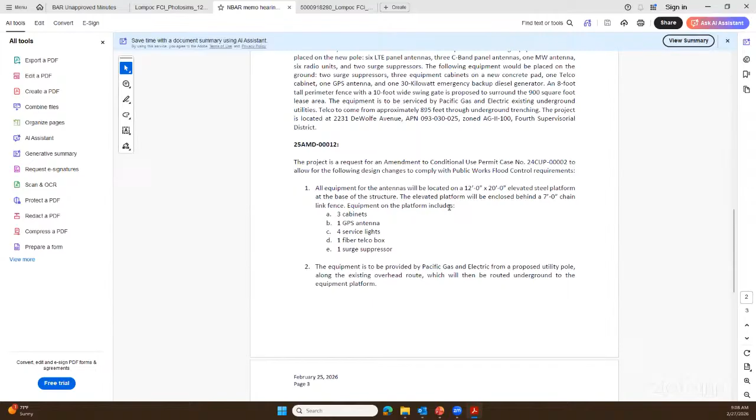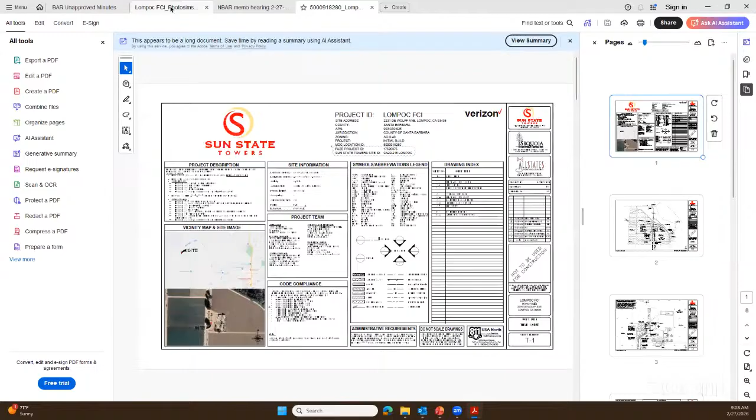All right, I just want to double check on that. Armando, you available? Good morning. Yes, I'm here. Okay. We've gone through this project in the last review items we had, and we looked at just the elevated platforms and what's going to be underneath—is there any screening? I think we've come to a point now where we can just approve this and you guys can be off.

Is there anyone in the audience that has comment on this particular project? We do not have any public comment on this. Then, having reviewed this several times and found it to be complete, do you guys on the board have any other final comments, or do we make a motion to approve this?

Wasn't there a question last time about having some construction details, which is why we couldn't approve it for final, and that's why it was going to come back on consent? We did look at this last month. I don't think that was the case. I think what they had done is elevated a certain portion of it because of the flood control concerns.

Yes, and I don't know if that was completely illustrated in the documents. I think one of the things we asked for was screening on the lower portion of it, but because of the critters and stuff that needed to pass through there, they kept it open.

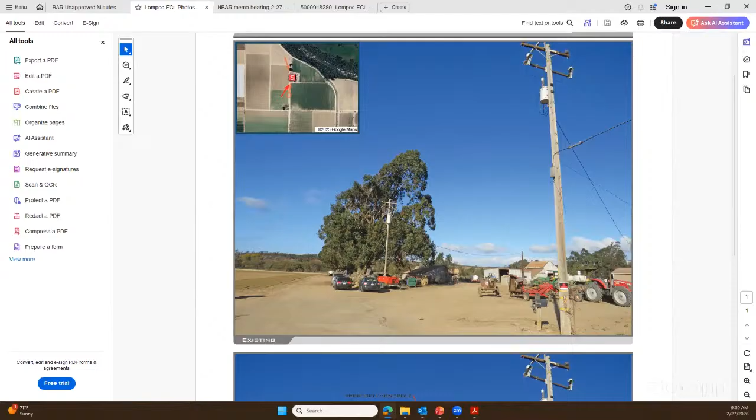So I'm assuming that's been done. Armando, is there anything you want to add? No, I think we're good at this time. Thank you. So with that said, I'd like to ask for a motion to approve this particular project. So moved. Second. All in favor, say aye. Aye. Okay, Armando, thank you, guys. Appreciate it.

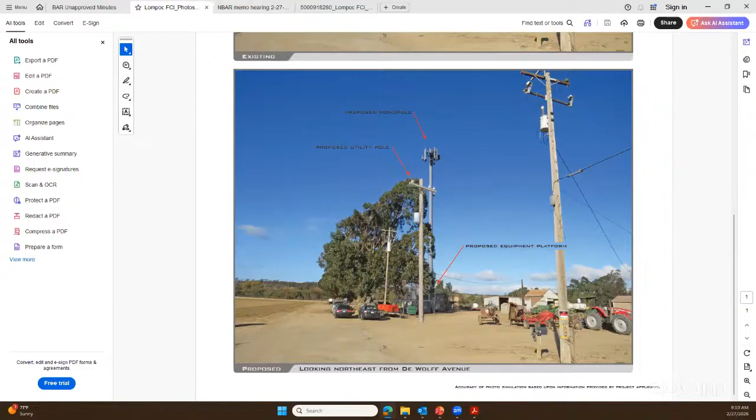All righty, guys, moving on to item number 2, BR 23-00183, Brisa Encina Child Care. Frank, if you want to introduce yourself for the record and begin your presentation.

Frank Thompson. I'm the- give me a second. Can you press the button to unmute it? There you go. Okay, thank you. Frank Thompson, yes, I'm the applicant for the project.

I think we've been here a few times and benefited from your comments. Give a little more volume. I'm sorry to interrupt. Yeah, no problem. That's better. All right, and I'll be assisted today with Pablo Romero, and I think also Guillermo is here.

He's the landscape architect. So if you want, then Pablo, do you want to give an introduction?

Yes, good morning, can you hear me? Yes. Oh, okay, excellent. My name is Pablo Romero. I'm representing RJC Inc., the architect for the project. On the last session, we were asked to address the murals.

We recommended some murals be installed in the two main facades of the building. We had originally picked up some generic imagery, stock images, and we were asked about that, and whether that was going to be the permanent imagery or not.

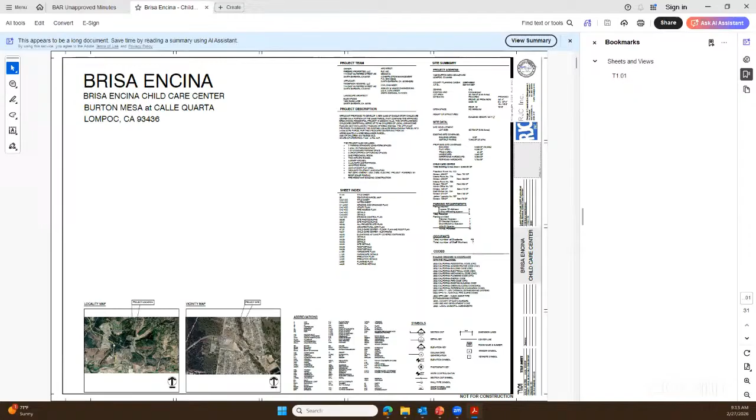Also, Guillermo Gonzalez, our landscape architect, will also be presenting his part of the design. So with that, I would like to jump, unless you want us to do a more thorough presentation of this. I would like to jump to sheet 16, which is the elevations.

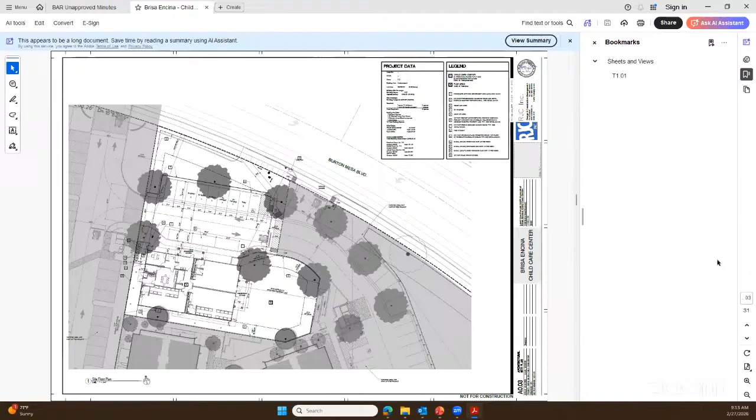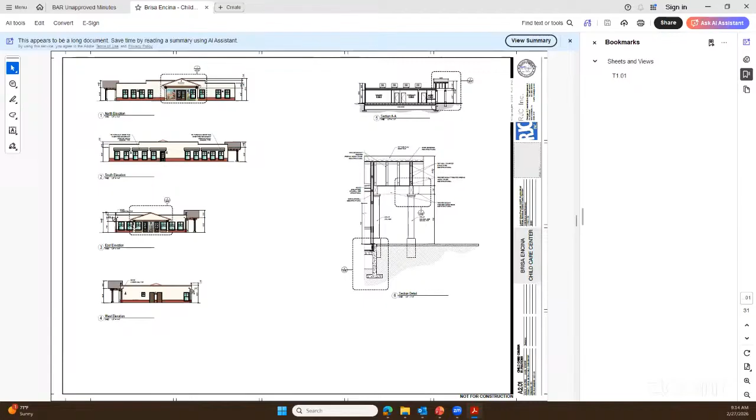Thank you so much. So as you see, we haven't modified anything relative to our elevations other than bringing up the imagery that Jose has generated. Let's go to the next sheet, where we have a larger view of those entry points. So these are now, at this point, originals that have been incorporated.

The theme is very jovial, and talks about bookworm and some other themes relative to the heart of the trees, going into this theme of reading and what have you. So this has been the interpretation that our local artist has generated, and how we've incorporated it into the design.

So again, basically it's the same concept architecturally speaking. We didn't modify anything in our architectural language. We basically just incorporated the murals from Mr. Bustos. That is what we have today to discuss from our end. Of course, we will be open to discuss any other items that the board might have.

And with this, Guillermo, I guess the floor is yours. Thank you, Pablo. Good morning. My name is Guillermo Gonzalez. I'm with Blue Studio, the landscape architect for the project.

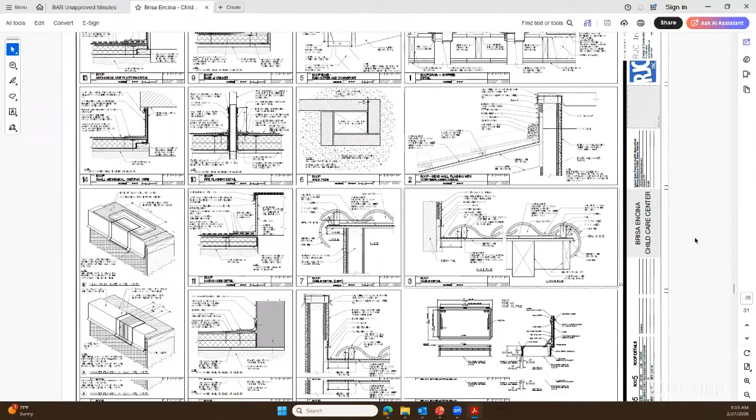As Pablo mentioned, we received preliminary approval back in November, and were asked to come back with a planting plan, irrigation, and details. So if we can move to the planting plan, that would be the hardscape. We're only providing hardscape for the play area and play details. So we have the irrigation plan completed, and then irrigation details.

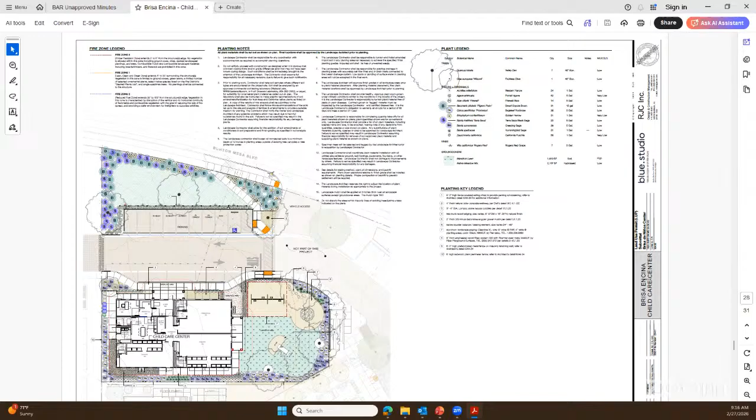And then we have the planting plan completed based on the preliminary approval, and the next sheet will be the planting details. So I'd be glad to answer any questions you guys have, but with this, I would conclude my presentation.

I went through your landscape plans, and they're pretty complete, and they're fine. I just had a couple comments for you. The runtime that you put in your notes of 5 to 9 p.m., I would reverse that from 9 p.m. to 5 a.m., given the wind, especially for the area where you have a spray system. It's probably just a typo.

And in your backflow detail, I would encourage you to include a cage and a thermal blanket on it. I don't know about where you are in Santa Barbara, but up here we have a lot of theft of backflows. Oh wow, okay, thank you. I appreciate that. Put the cage on there, save yourself the long-term money, and a thermal blanket, because you could have a potential for freeze up there. Okay, I appreciate that. Thank you. And that's it. Thank you.

Mr. Chairman, just real quick for Kevin, do those usually come colored, like colored green, the cage and the blanket? Yeah, they come, you can get them painted green or stainless steel, either one. But a lot of people use the green ones if they're in landscape to help it disappear. But either one of them will be fine. That's your choice, it's just a suggestion. I'm not making it a requirement for you.

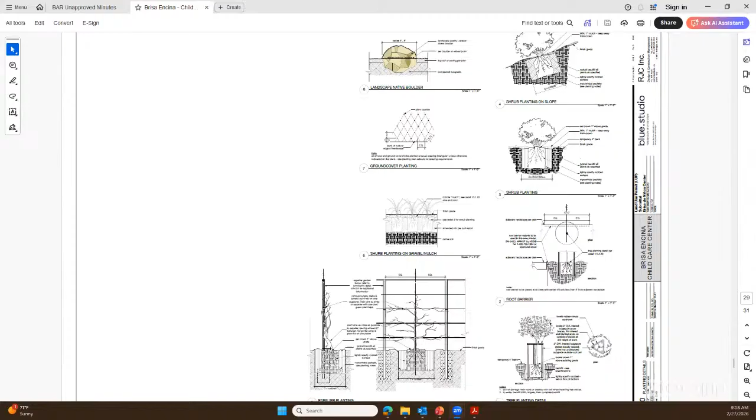Okay, I have a question about the murals. Could we see those larger, please? I guess the next sheet is the one.

Look, hmm, like what we saw before. The colors were brighter. Yeah, yeah, I believe that was all just stock imagery. I'm sorry, it was all stock imagery? No, the one that we saw that had these trees on it, it seemed to me 10 minutes ago it looked brighter. Yes, yeah, I concur. There you go, there you go.

Just a comment, my first impression when I looked at this was, are kids going to see that as scary? Those trees look a little kind of haunted to me. It may just be my taste. I don't know, but I think it might be an interesting thing prior to making a final decision on this to maybe have a couple of kids just look at it. They're going to be walking in and out of there every day, and unless they're going to have an explanation as to what these mean, and they may have significance, they may be very well thought out. I don't know what the story is about them, but right now I look at them and they're kind of gangly, they look like a tree octopus, if it makes sense. And one side, I don't see how it relates to the other. Those are just my personal comments.

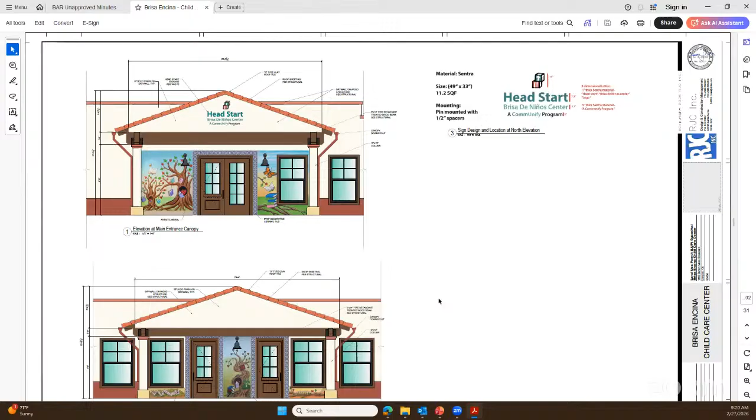On the elevation there, I don't know what material you're using. It says drywall. Is that what you're supposed to, is that what you're using, where it says Head Start? Hello? I'm sorry. Yeah, it's actually stucco finish, it's supposed to be stucco and not drywall. It's listed as drywall on all your details and that stuff, so you need to clean that up.

Also, I'm not going to require that you do this, but you need to really look at the top of the column and how it intersects those beams, because you're going to end up with water and you're going to end up with rot. So you need to address that in some thought-out details.

You've got a parapet wall that's sticking up 1.5 feet right there. I don't know how thick it is, but I think it's going to read as a thin wall. You need to beef up the corner of the parapet so that it reads as like 12 to 24 inches thick, so it's more like a stucco-y kind of a heavy feel.

And that's about it. Excuse me, do you mean the parapet wall behind the gabled structure? Yes, on that drawing it's over on the right side, it shows it's about 1.5 feet higher, the area in the middle where you're gonna see the edge of it. You don't want to just have a little wall sticking up. Oh, I understand, I understand what you're saying. Make it look at least as thick as your columns, which are gonna be like 12 inches or something.

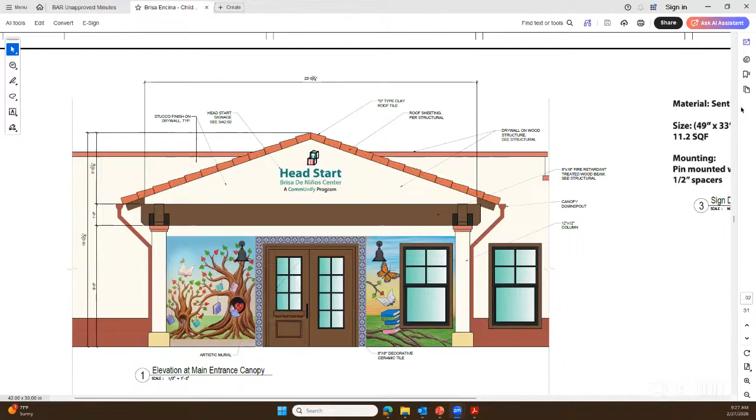You're supposed to see some architectural details around the windows too. We do have architectural details, we presented those the last time. I think you can see those starting in sheet 18 - we have wall types and what have you, starting at page 18, 19 is wall details, parapet details.

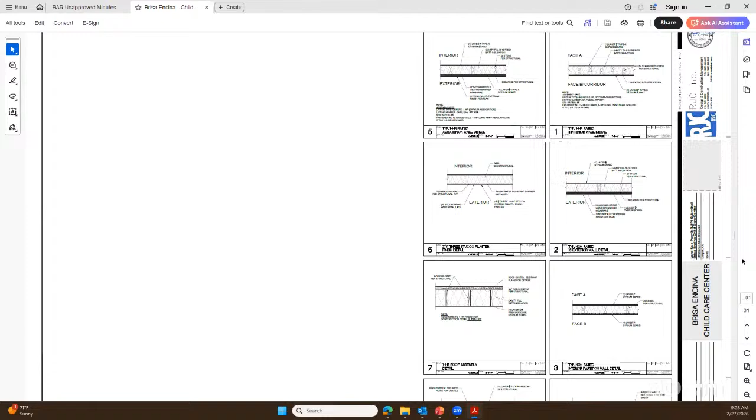Okay, well I was thinking more along the lines of the trim around the windows, around the doors, how you've shown tile around the door, the details for that. I believe that was lacking from your previous submittal. I know you had the wall sections, which are the actual plan construction for the walls, but I was thinking more along the details of the windows and doors, how the tile - but maybe you've included those now too, maybe I missed it.

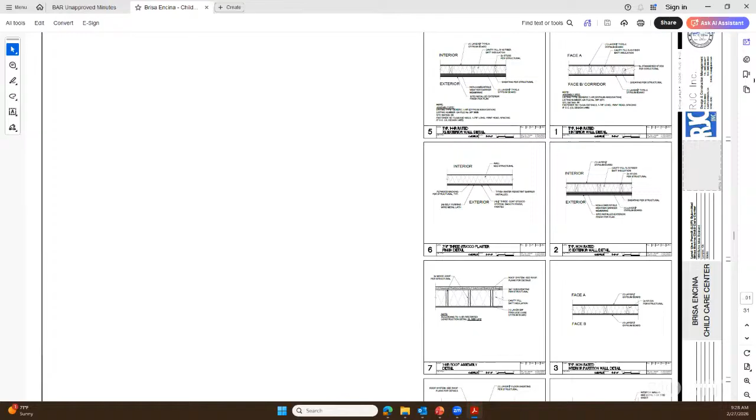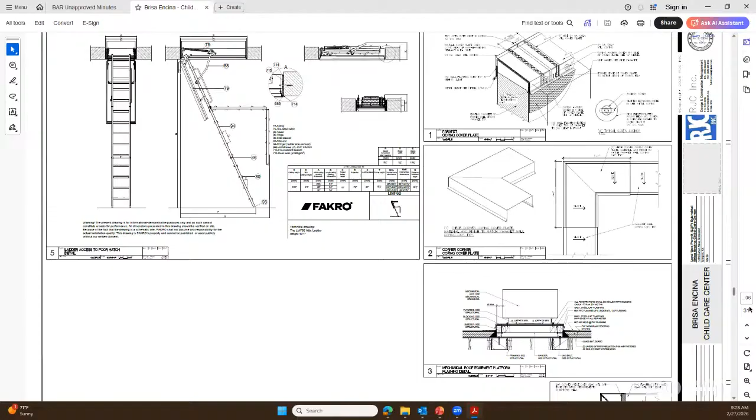Can you direct us to those details if you have them? I don't think we have the specific tile detail, but we do have the baseboard detail, for example. We have connection of canopy beams to columns details, that's on page A403, the column details that were requested.

The comments we received a couple of meetings ago, we poured all those in. Are we missing some details? Yes, we are, we're still not in building. I'll withdraw my question. Don't worry about it.

How far along are you on the construction side and the building permits submittal process? We have not started that one. There's a funding situation here where planning is kind of required to get funded for the remainder of the process, and to that effect, Frank can talk more about that.

Going back to that last drawing, when I was talking about the top of the column to beam detail, detail 9 for instance shows a structural connection, but it doesn't show - you're going to end up with these little water pockets. What I was really asking about before was how the stucco works and how the flashing works, and how you're going to make sure it doesn't end up with a puddle. So it's just something you really need to flesh out, on that gigantic beam.

The flashing detail, you mean? Flashing and how you're going to trim the top of the stucco, whether you're going to put something up there, how it's going to work. Because right now, when you add stucco to it, you're going to end up with a pocket about 1 inch deep where the beam goes across, and you just don't want to do that. If you can just combine details 9 and 2 - yes, because it was left off, the beam.

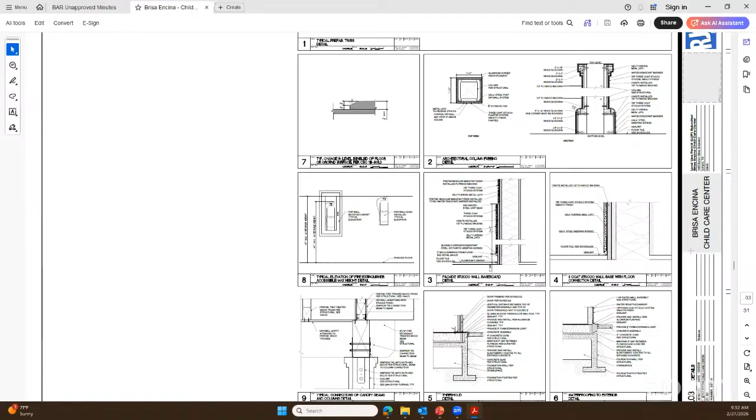With that said, I'll ask for a motion to grant final approval on this project. So moved. Second. All in favor? Aye, aye. Okay, off you go, great. Thank you so much. I want to see it when it's done. I'll see it every day. Thank you.

Okay, moving on now to BAR number 2300186, the Mittry Farms Personal Storage in Orcutt. If the applicant is available, please go ahead and introduce yourself for the record and begin your presentation.

Good morning everyone, it's great to be back. Francis Romero for the applicant, but today we have the man behind the magic, Locke Soderquist, our architect. So it's pretty much going to be his show, and I'll be here to cheer him on and provide support as needed.

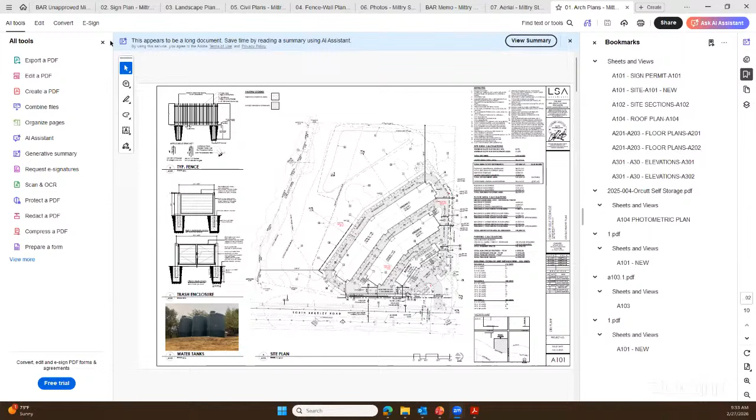All right, thank you. Thanks for having us today, and thanks for making the time. That's an amazing painting, I've been looking at it all morning, it's awesome. My name is Locke Soderquist, I'm with LSA Architects, and we are here to further conceptual review the Mittry self-storage project.

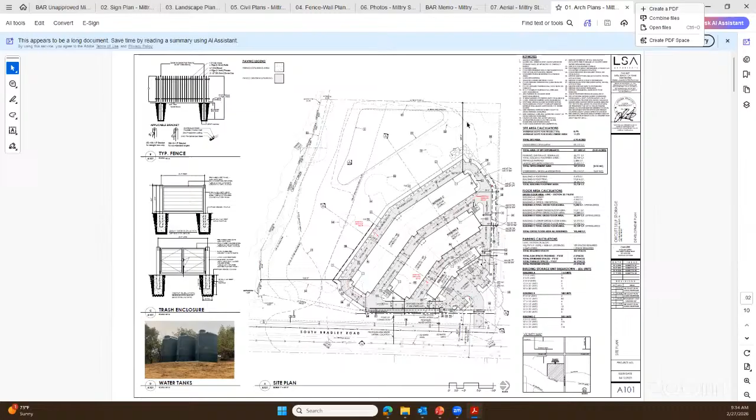It's a new personal self-storage facility on a 6.93 acre parcel at 5175 South Bradley Road in Orcutt. You guys have looked at the project before, but it's been a while, so I'm going to recap all the details. The project consists of 3 two-story buildings. Building A at the top is 9,240 square feet. Building B is 38,099 square feet. Building C is 55,398 square feet, with a total floor area of approximately 102,700 square feet. The project consists of a new monument sign, front setback fencing with walls exceeding 6 feet on the interior side, the project development side. There are no existing structures currently on the site.

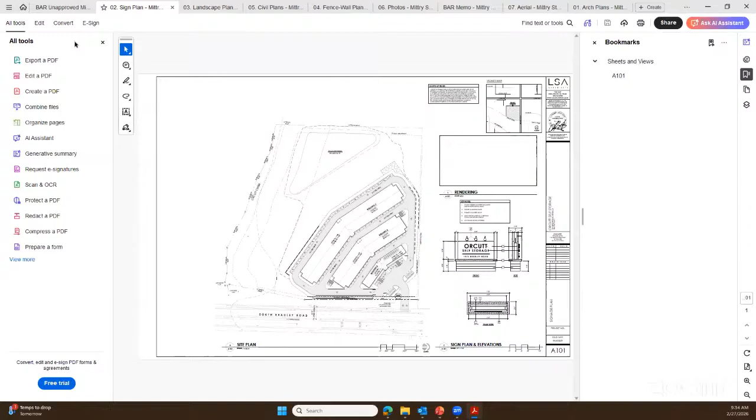At the August 29 meeting, the board was generally supportive of the design and provided several specific comments. Today, I will briefly describe the project and then address each comment directly.

So a brief project overview. The site slopes downward from north to south towards Orcutt Creek. The buildings are stepped down to follow the natural grade. There are driveways between the buildings that access the upper or lower level, depending on the building. The tiered configuration reduces perceived mass and follows the existing topography. The grading plan maintains the previously appreciated stepped approach and contouring along the creek edge, minimizing visual bulk and integrating the project into the slope.

Architecturally, the buildings utilize articulated facades, clerestory windows, and material variation to reduce scale and provide some depth. The roof form is a low-pitch standing seam metal roof, or corrugated metal roof, with stepped gable ends that break up the Bradley Road elevations. There will be no rooftop HVAC equipment, keeping the roof planes clean and uninterrupted.

The previous NBAR comments, we had a few of them. You guys requested street level renderings, so we provided some, with views from Bradley Road and views from the creek, the development that's opposite of the creek.

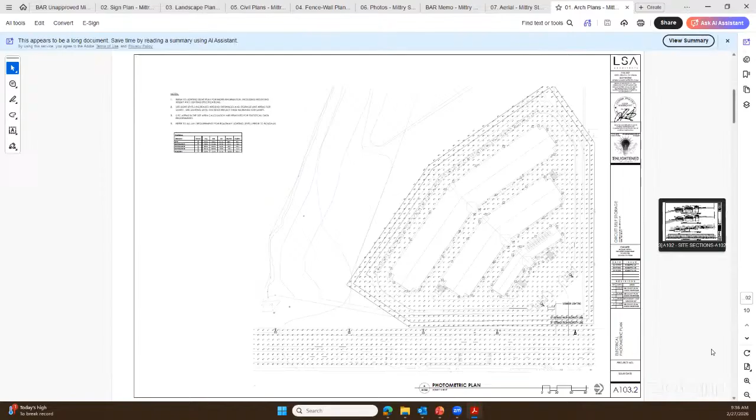Another comment was studying the large roof planes. The board requested further study of the large roof expanses. In response, the roof has been articulated on the gable ends, which was actually something in the previous submittal. The gable ends that face Bradley Road are articulated.

There was another comment related to dark sky compliance, and all the proposed site and building lighting is fully shielded and downward directed. All selected fixtures will be dark sky compliant.

There was another comment regarding the grading and step contouring, which we've maintained. The overall design approach from the beginning was to create these shapes that followed the contours of the site. We were sinking the buildings down into the site as far as we could to shield them from view on Bradley Road, while at the same time keeping maximum driveway slopes to something manageable.

There was another comment related to roof-mounted equipment, and we don't plan to mount any HVAC equipment or anything on the roofs.

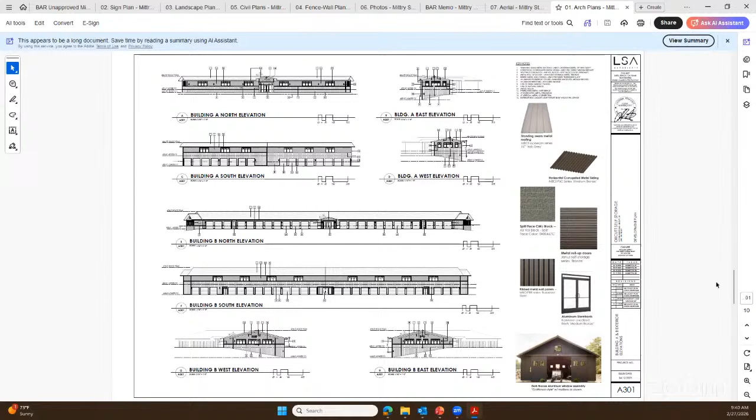The monument sign is a separate submittal, shown here. It's a 6 foot by 3 foot tall sign face with painted aluminum panels, cut acrylic block lettering, and a board form concrete base. The lighting for that sign would be dark sky compliant. The sign is relatively modest in scale, with landscaping around its perimeter.

In summary, the massing has been articulated while still maintaining the functionality of the project. It follows the slope of the hillside. The gable ends visible along Bradley Road are articulated with step-down segments and clerestory windows. There's no rooftop mechanical equipment. The lighting proposed is dark sky compliant, and the grading follows the natural contours of the site. The views across the creek were considered, and we request the board's continued consideration of the project. I can answer any questions you have.

I just have a couple of things to add for context. At our original meeting, the driveway was in a slightly different location. It has been relocated based on requests and requirements from Public Works Transportation. And again, as mentioned, the sign plan is a new submittal along with a CUP for the fencing, because our wall and fencing along Bradley in the right-of-way area exceeds 6 feet in height. But as you can see when we look at... oh, that's different, can we go back to the visual sim?

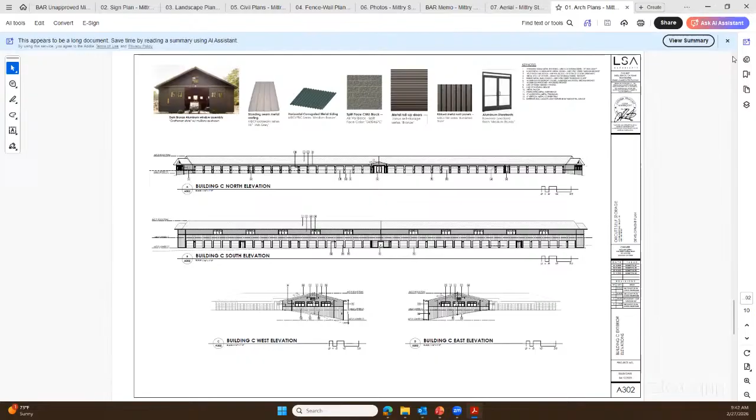Wasn't there some question initially about the water retention basin or infiltration basin down below and its adjacency to the creek? We're addressing that with a text revision. We're already doing a general plan amendment, and based on the fact that county policies allow those types of public infrastructures, we're basically adding the word private infrastructure — really, what's the difference between a publicly built basin and a private one? There is no difference, and the water flows downhill into the creek anyway, so it's more of a pragmatic approach. My question was basically whether you have continued consideration on that issue and are working to resolve it. Yes, and staff is supportive of us submitting the additional text amendment to allow private and flood control as well. Okay, great, thank you.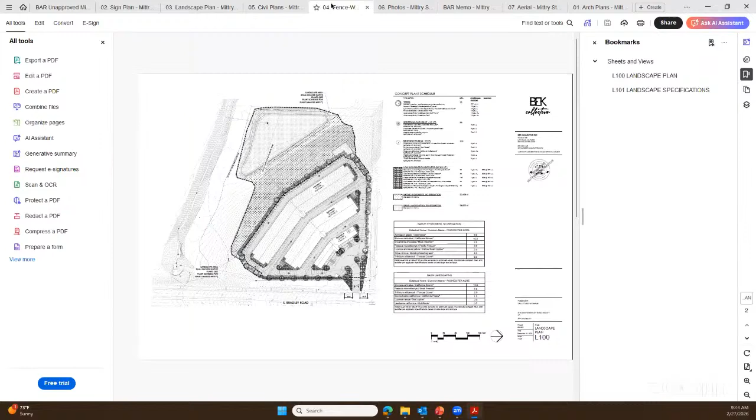I'm trying to understand the grading concept a little bit. You've got 10-foot plates, and each building drops 10 feet, correct. Is the right side, the north wall, pretty level? Not the driveway, but the property line — is it level? The property line maintains existing grade. Is the existing grade pretty level across, or does it slope? It all slopes, yeah — all the existing grade slopes down towards the creek. Does it slope north to south on our lines, does it go downhill or is it level? Let's look at the grading plan. I think it varies — in some places it slopes down towards the site, in others it slopes up a little. Because of the way your buildings are designed, it drops 20 feet from one end to the other, correct. So it's not really following the contours if it's level, right?

Well, the way we designed it, we're maintaining existing grade from Bradley Road at the public right-of-way property line, with a wall and security fence on top. Then inside we have driveways that make the 10-foot transition between buildings. So when I say follow contours, the contours are kind of a boomerang shape, and we designed our buildings in that same shape. Building C follows the contours, but the driveway on the right side is significantly lower than the property to the right, correct, by about 20 feet. So you've got a 20-foot retaining wall? I don't think we have a 20-foot retaining wall there — if we zoom in on that area you could see the max height. The top and bottom of wall elevations are described there; I think it's 14 feet total.

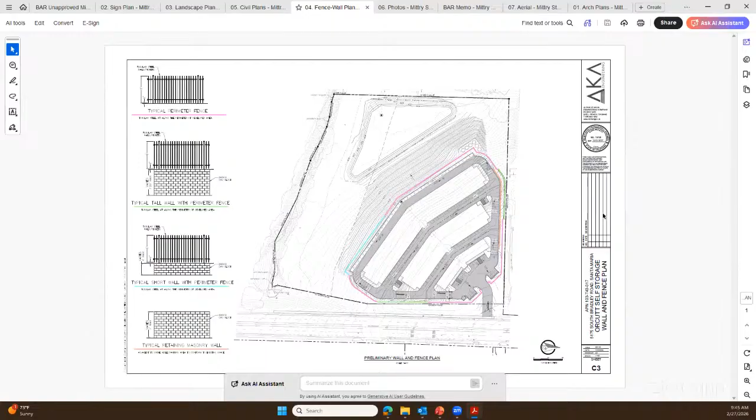And so what we're trying to accomplish there is just sink the buildings into the site as far as we can to limit the visuals from the outside.

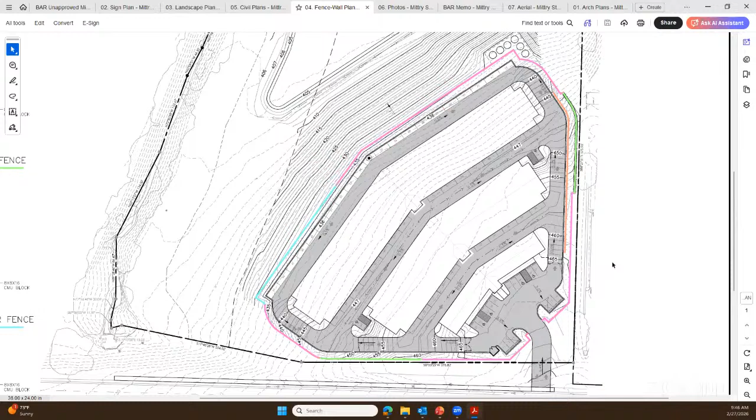Where does the retaining wall start? Is that the green? Is that the retaining wall? Yeah, there's two of them. The green one, and then on the inside there's an orange one. If you go to the left, we can see the legend to see what they are. Oh, I see, each one is individually labeled.

Okay, so the green. Let's go back and look at the grading plan. I don't want to look at the retaining wall, I want to look at the grades.

So how does it go up in that upper right-hand corner? What are the grades, you've done a lot of grading there. We have, we've sunken the buildings into the site. There's a location where there's only 10 feet from the property line to the driveway, maybe it's 12, I don't know the exact dimension, but because of that we have a substantial elevation change at that location, and we've accommodated that with a terraced retaining wall system.

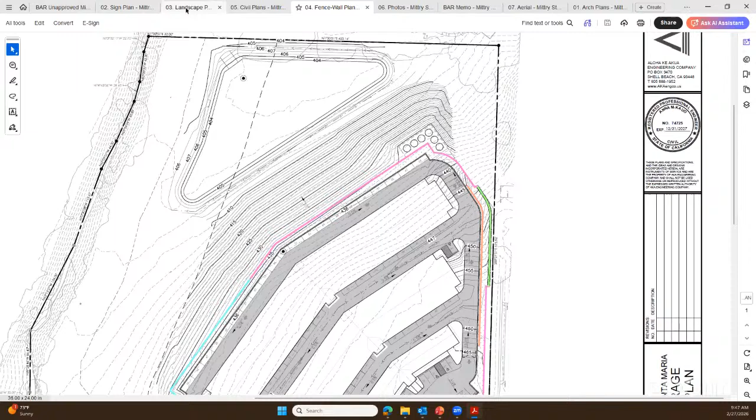But there's actually a better way to look at this. If we look at the grading plan, we can see the actual spot elevations right there. Do you have a grading section through there? There is a grading section through there. Yeah, well right there - there's your stepped walls. I like stepped walls. Yeah, so you can see the typical section A is over on the left-hand side.

Yeah, I'm pretty sure that corresponds with that location. So it's like lower left, if you're able to scroll up on the sheet, lower left side. Yeah, there we go, so that would be the section that describes that location.

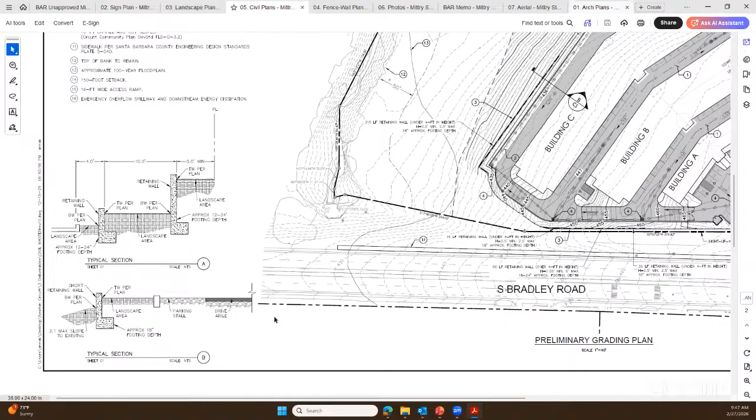No, I mean showing the buildings, the existing lot, the existing grade, the future grade. We do, kind of - we have that one too, that's in the architectural set. So if we scroll up, there's a section sheet that shows overall site sections. Yeah, keep going - right there, up one.

And so if you could zoom in on the top, that's natural grade versus the building location, and it depends on where that's cut, because the farther you go to the top of your sheet... yeah, it changes - the existing slope radically changes.

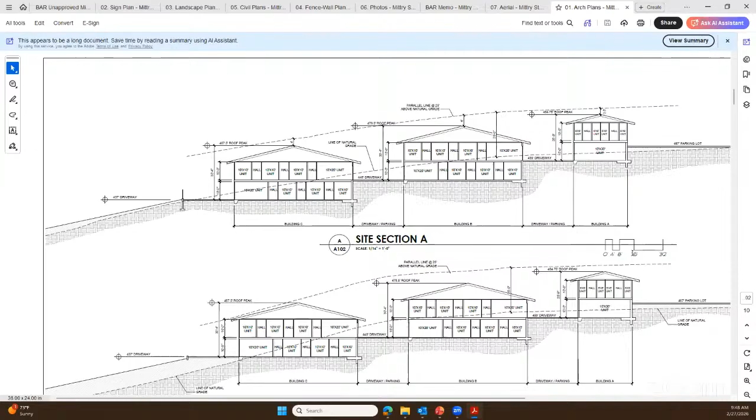Yeah, you're right. So if you can see the two different elevations, the natural slope runs through on the upper one - you can see the lower dotted line that's curved is the existing slope. And then down below it raises a little bit depending on where it's cut on site. But the site plan shows those two cut locations, so you can evaluate both those locations as they relate to those sections.

And then that would be the view along Bradley Road. Where do you have your stepped retaining walls? How much depth, how much width are you putting in there? Is it like the size of the footing or just...

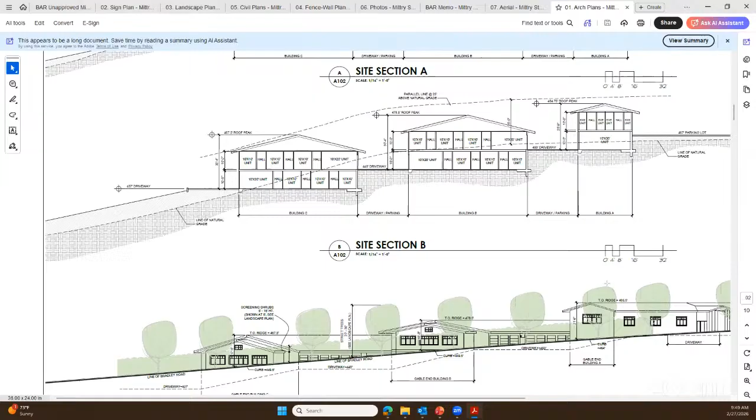No, from one retaining wall to the other, do you have significant distance - is it 10 feet, 20 feet, 50 feet? Yeah, there's - so the building, you're talking about the total building width, like you can see the distance between those retaining walls. I mean, on your grading plan, where you have the 14-foot cut. Yeah, it's 14 foot over how many feet? Oh yeah, okay, so if we go up there and scroll back to that grading plan sheet that showed those sections, there should be a dimension on the site plan or the grading plan that shows that.

I want it to look as natural as possible, but I'm not visualizing exactly how big a scar you're putting in and how it's going to blend in with the existing creek. Yeah, so all of that.

Well, if I could for just a moment, the Orcutt Community Plan dictated the location of the driveway at the northernmost corner of the site. It also dictates that the 3-acre envelope is what we're allowed to develop, based on the approval of the Orcutt Community Plan.

So the Orcutt Community Plan envisioned the 3-acre area where the buildings and driveway are located as being the area of development. The only time we went beyond that 3 acres was to fill the slope so it would have a natural appearance without showing the 14-foot retaining wall system from the southern view.

I know what spot you're talking about specifically. Thanks, Francis. So you're talking about where we cut that section.

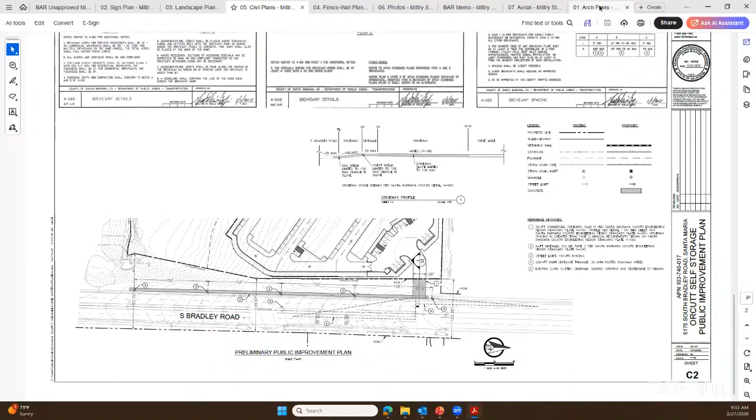I think the site plan, the next sheet or two up, will show an actual dimension there. So we have 19 feet 3 inches from the property line to the driveway, and both of those retaining walls are dealt with in that 19 foot 3 inch setback.

Those are shown on the site plan as the dark, hidden lines. Downhill from building C, beyond the fence line, it's cut on site, and the site was altered so we took some of the cut from this area and put it around the backside of that lowest retaining wall to reduce its size as it relates to the Orcutt Creek view and the view from that direction in general.

So the retaining wall was probably about 10 feet tall, and we're backfilling, taking some of the material and grading it out to reduce the height of that wall. We're trying to do that in an organic way that follows the natural contours as best as possible, and it's planted with native plantings.

I don't remember the retaining wall heights on your double cut section, are they 7 feet apiece or something? You know, those civil sections always do a vertical scale and horizontal scale that don't match, so if we go to the grading plan again there should be spot elevations showing top of wall, bottom of wall. I don't know them off the top of my head, but we can get them.

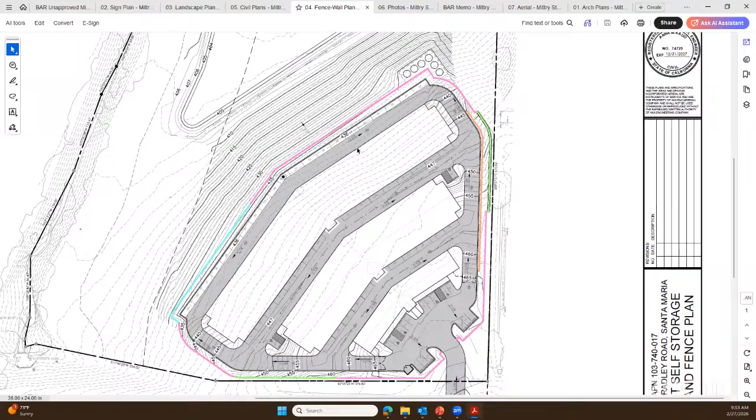I just mean visually, from inside the development that's where you'll have that impact with those two walls. From the outside, we're trying to maintain natural grade so you don't really see any transition. So building C will be lower than the existing grade currently - yes, they all are. But the far end of building C, on the south side where that parallel parking is, will be elevated a little bit above natural grade.

Did you have to deal with hillside ridgeline rules at all? We did, yeah - that's why it's down. You can see in those building sections or architectural site sections we had that max height limitation plotted there, and we're well below that. But let me get up there closer to see what the elevation sheets are.

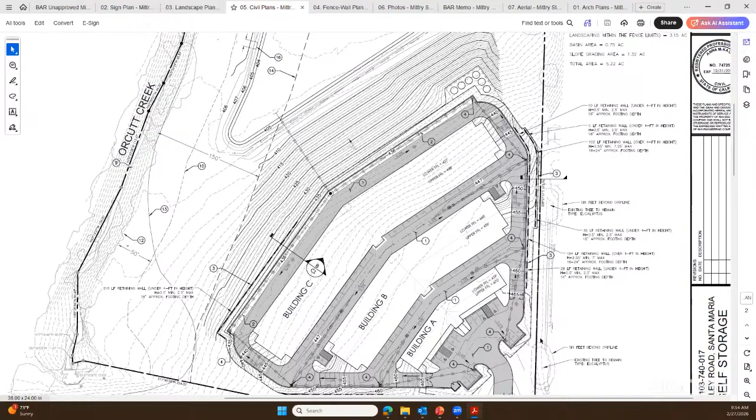Can you take it with you? I could just make it larger. Okay, well I was just looking at it. So it looks like the lower wall is 2.5 feet max height, and then the upper wall has a max height of 7 feet.

So the rest of it's made up with slope? Yeah, there's actually not that much slope there because it's so tight. So it's basically just two walls terraced at that height with a slope area between them that's sloping the other direction, downhill, and that would all be landscaped too.

So it's not as high as I thought. It's actually like 10 feet max height total, both walls combined.

Okay, now I kind of understand what's going on. I like what you did with the end of the buildings. The thing I have a problem with is you've got a 20-foot face on that bottom one.

Well, what kind of fencing is going around it? We're proposing vertical iron fencing, so you can see through it. But it's going to be shielded with landscape. Our landscape plan has pretty dense planting.

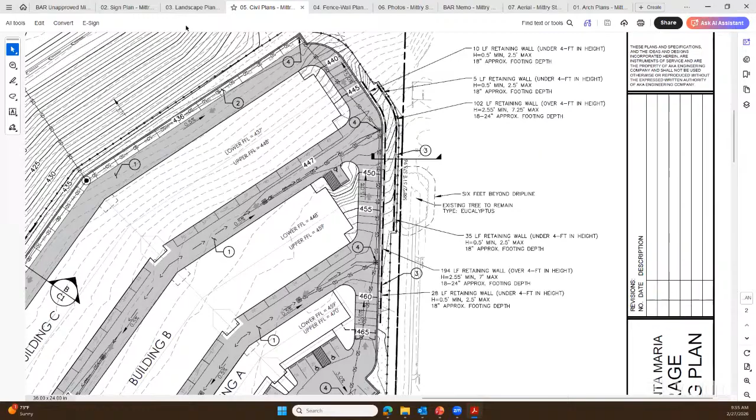The problem I have is that lower one. The ones in the middle I don't care about, but the ones on the edge, you've got a 20-foot high wall. You broke it up with two materials, which is cool, but it would be nice if it had some kind of roof element that went around on that side, to make it perceive as being even lower than it is.

So you're talking about the building wall itself? The building wall, yeah, those gable ends that face Bradley Road. Not the long boomerang side, the one that's a 20-foot high face. Yeah, and it's going to look ginormous.

It's big, but it's kind of like a catch-22. We wanted, basically our inspiration for this was historical, like agricultural storage buildings. There's a giant building right here, I think. Yeah, they are big, but you have buildings that are large. The form kind of follows the function, right?

So we have buildings that are simple, large, economical, efficient, and we're placing clerestory windows in a configuration that gives it this historical articulation. And then the siding materials help do that as well.

So I just fear that if we plant gable ends or something on there to further articulate it, not just a gable end, drives up more cost. More like a shed roof that ran around so it looked like another layer coming down. Okay, yeah, I get that. So an eyebrow at the lower level, just on that back one, and it might be cool.

I was trying to look at your vehicle stuff. I don't know, it would still be 10 feet high. Yeah, you can't bring a semi down there, but why would you? That's actually not a bad idea. I do like that idea, because it would lower the whole thing and give you another layer of stuff.

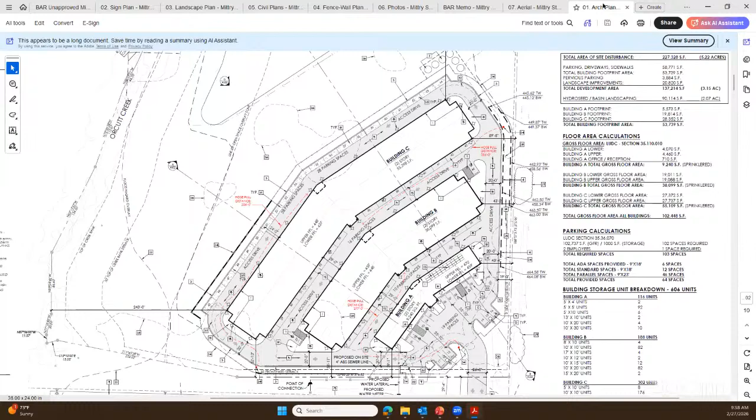Can we go back to the elevations, the three elevations once more? The articulated ones, rendered. Yep, yep. These...

Primarily an offset pitch roof, where it wasn't a straight-on pitch, but it was offset, sloping more on one side. Secondly, the fencing, instead of it being vertical with everything else jumping up so much, the fencing would be horizontal, same material but horizontal.

I think the weak point here for me, design-wise, is the entrance. It's not as welcoming and as integrated into the vibe of the spot. This is a very prominent spot here.

It has the potential for people to drive by and see it as something artful instead of something just utilitarian, with some minor tweaking. Like, for instance, the sign - it's kind of pedestrian in light of the architectural and creative elements of the way you're stacking these down the hill, which is artful.

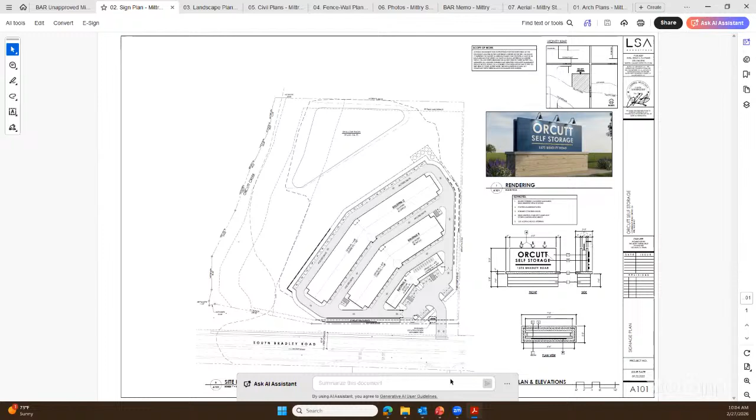We go to the landscape plan. Just gonna ask that. Okay, yeah, it looks like.

Are you gonna do nothing between the fence and the roadway? Are you just gonna maintain what's there? Yeah, I think the transition from natural grass to our landscape will be a nice transition. If we tried to landscape all the way to the curb, I feel like it gets a little overdone. I like to have that border of grass and then transition to a more manicured landscape. So we're planning just to leave it the way it is. Okay.

Is there a reason that you just held the landscape at the top of the slope, on the right side, the graded slope? Yeah, we wanted the graded slope to be planted with a natural grass and wildflower mixture, so it doesn't appear to be expanding the project. The idea is most of the site is left naturally planted, and the perimeter shrubs are more for screening the project from the rest of the site and from Bradley Road. So we felt it was better not to landscape all the way down the hill, just plant that with native grasses and wildflowers, and start our landscaping right at the perimeter of the project.

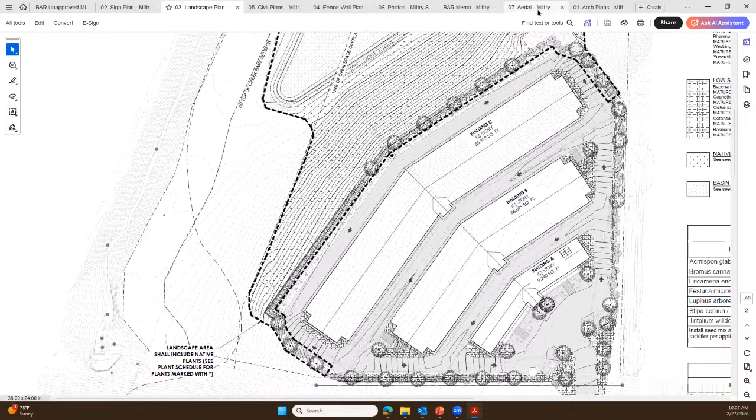Maybe we can look at those renderings again if you're able to flip to that. If you look at the elevations, you had trees all the way across, and then in the visual sim you've got a few trees down here at the end. I understand you need to show the building and all that, so I assumed that was what was going on here. But I think you have a really good opportunity to create a more naturalistic edge there, and screen that out.

I think that's something that we can easily do. I mean, our original intent was just to hold the development perimeters as tight to the proposed project as possible. But if we want to project down with a little bit of landscaping and make a smoother transition, I totally agree with that.

And that's the current aerial, so you can see the neighbors to the south already have a pretty robust perimeter of trees that will obscure their view of anything. So the view sim was taken from the position of where the public trail might one day be located. And we really tried to - the rendering consultants, I mean we had a forest and then I had them scale it back, and it's still a forest understandably.

I'm okay just pointing it out - let's let our landscape architect look at this. El Bianca, not to get mad at me, but it looks really regimented along that edge. No, I understand where you're coming from. That's kind of the whole idea of the roof offset, to make the landscape a little less structured. I think that's absolutely right. In plan it looks structured, but the intent is to be more like an organic arrangement, a looser arrangement.

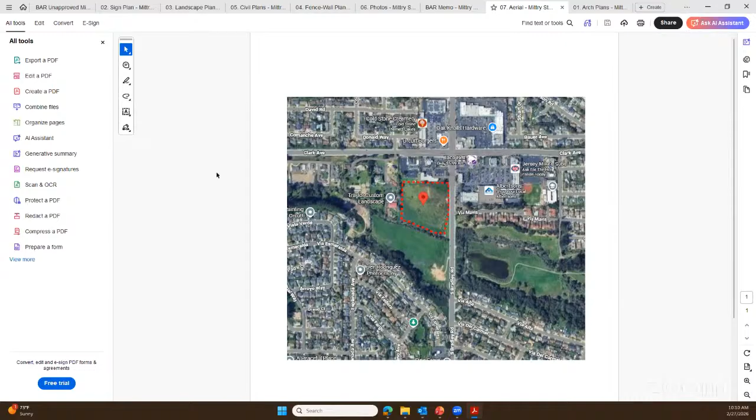So I think today, what would be the next step? Is there another preliminary hearing after this one, where we'd have an opportunity to make minor changes, or is the next step more formal? The next step is more formal. These are all basically just suggestions.

No decisions will be made on it. We are just giving you the opportunity to hear us out, and then you come back with your formal application, at which time we would go through the preliminary review of everything. I love all these ideas, I want to get started, but I also want to make progress through this process. So if we can come to the next one with these ideas, that would be great.

Yeah, because I don't see the point of having more conceptual review on this. You would go right into the application. I think maybe there was some miscommunication or confusion. I always thought we did conceptual, then preliminary, and then we come back for final after approval. I was recently told that we don't come back for preliminary final until after approval. Could you clarify the steps? I've heard it both ways.

I can weigh in on that. The way the code is written, you wouldn't come back for an appealable decision, a preliminary approval, until after the decision maker acts. So that's probably why the planner conveyed that information.

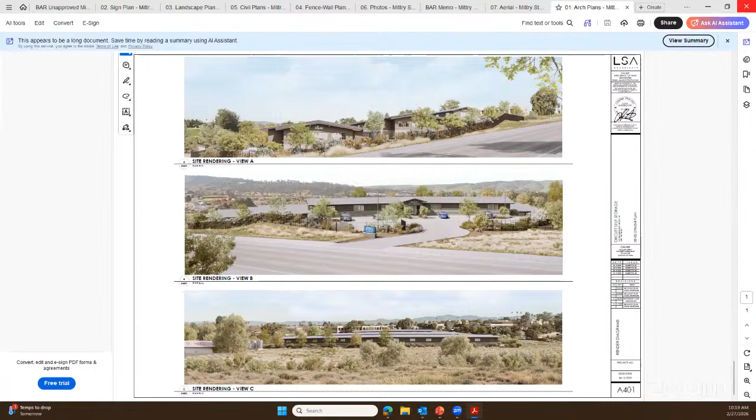So when are you going? Okay, to Hawaii?